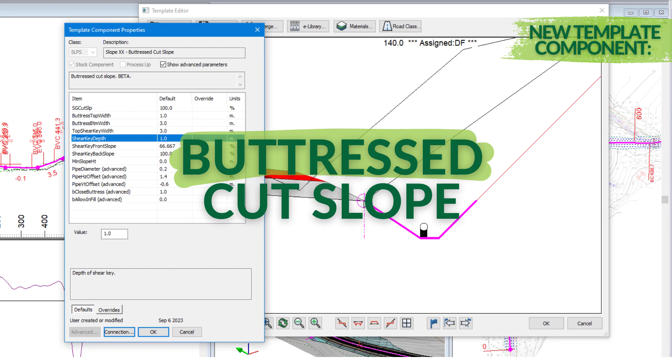This video we're going to go over the new buttress template component. So we'll go up to our templates. I'm going to merge that into the file. Of course you can find it on the eLibrary. I'm going to get mine from here.

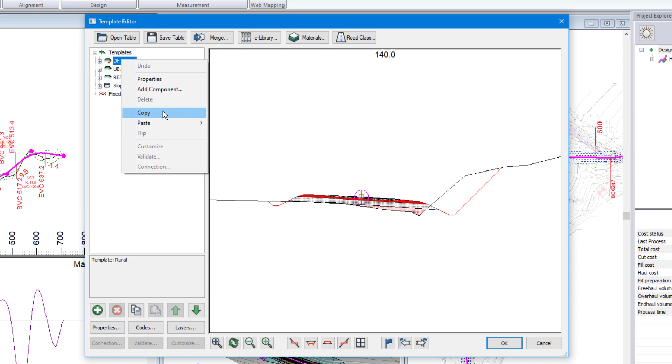So we want to add this into our default template. I'm just going to make a copy of it. I'm going to take this, I'm going to copy, I'm going to paste as right, and there we go. Now I'm going to just do a couple things to really get a feel for what's going on. One, I don't want the ditch with this, so I'm going to remove that.

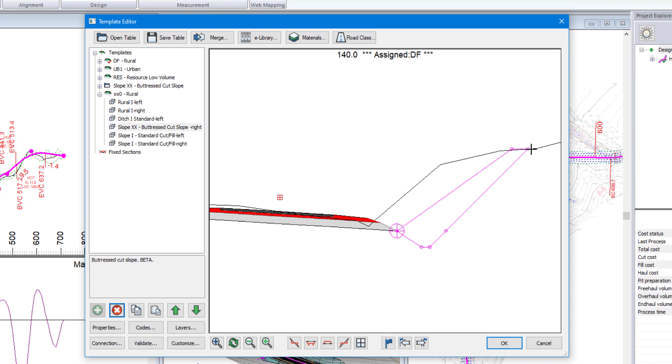So this component, by default, will show your subgrade cut extending up to the bank and blanket it with surface for material. Now when we open this up, we can change our parameters. So a few common parameters to adjust. One, if we want to change our cut slope, we can. So I'm going to just set this to be 125. So we can see that subgrade cut slope controls the back slope of your material.

Now the slope of the buttress material is going to be dictated by the width of the material at the top. So I've got that set at 1, and I've also got the buttress width at the bottom set. So if I reduce that, we can see those are influencing the width at the bottom. Next we have our shear key width. So again, I'll adjust that.

And we've got our shear key depth. So if you don't want that notch dug out to place your material on, we can remove it by setting that shear key depth as 0. We've got our shear key front slope. So that's that slope there. And we've got our shear key back slope. And if you want that continuous to go all the way up with your subgrade cut slope, you can set that to be the same value.

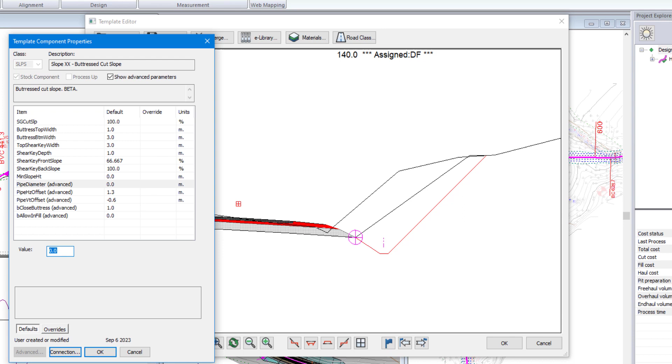Now we can come in here, and if we'd like, I'm going to just change this to match my personal preference. I can expand those advanced parameters and we can add in a pipe. So I'm going to say let's go with an 8-inch pipe in the bottom here. And then we can control the position relative to where the shear key back starts. So if we want to move that closer to the road, we can increase that number. Further away, we can decrease that number.

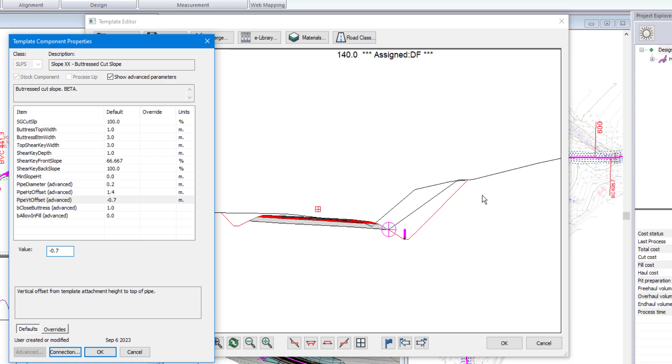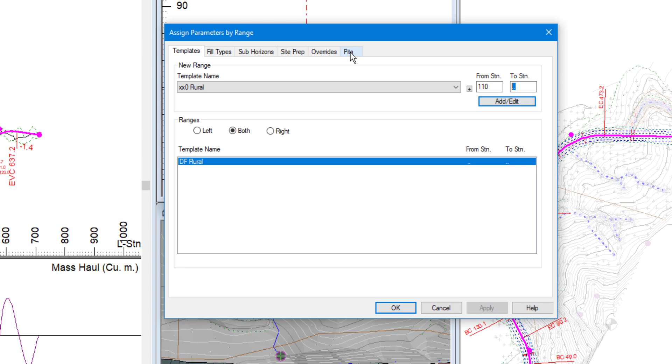And depth, same thing. It's going to be measured from the tie point. So if we want that deeper, we'll increase our number here. So I'm going to leave that as I have it configured. We'll hit OK. And I'm going to apply that from station 110 all the way to 290. So I just left that called as XX0. And back here, we can see it's behaving as it's intended.

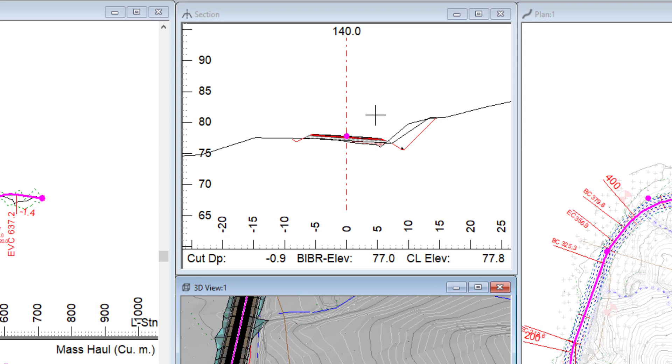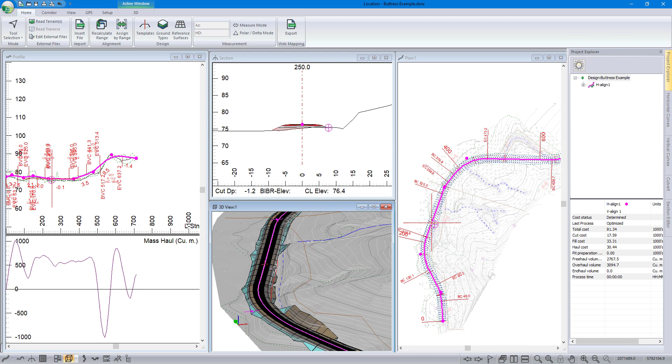Now, a less intuitive feature in this template is the ability to tie it to either a minimum fill height, or we can tie that fill height to a reference feature. So on this topo surface, I have this feature called TOB2. I'm going to set that up to be a reference feature that my template uses, and I'm going to use that to fill all the way up to that existing top cut slope.

So back in here, we've got this component here. One, this is being excluded because it's going to end in fill. So if I want to always have this template appear, I'm going to allow in fill on. Then we have the closed buttress. I'll leave that on. But up here we've got our minimum slope height, and if I wanted that to be a fixed value of, say, 3 meters, I could set that. But here I want something smarter where it goes up to the same elevation of that top of bank.

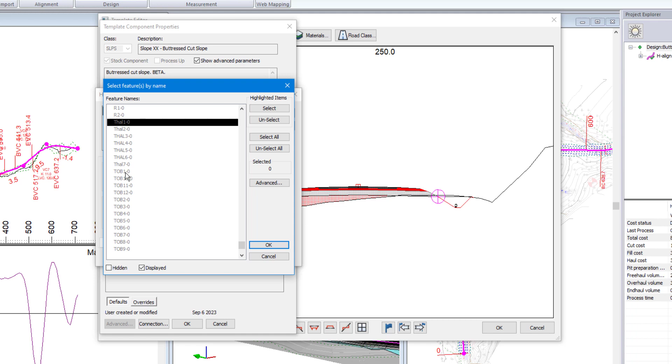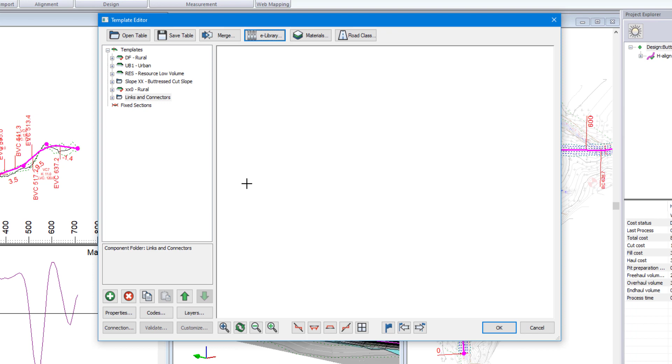So I'm going to use a feature. So that feature is top of bank 2. There we are. So we've got that, and then if I want to actually have that fill daylight straight across, I'm going to combine this with our daylight component. There we are. So we'll hit OK. We'll hit OK. And voila, we have our buttress that extends up to the desired elevation as we'd like.